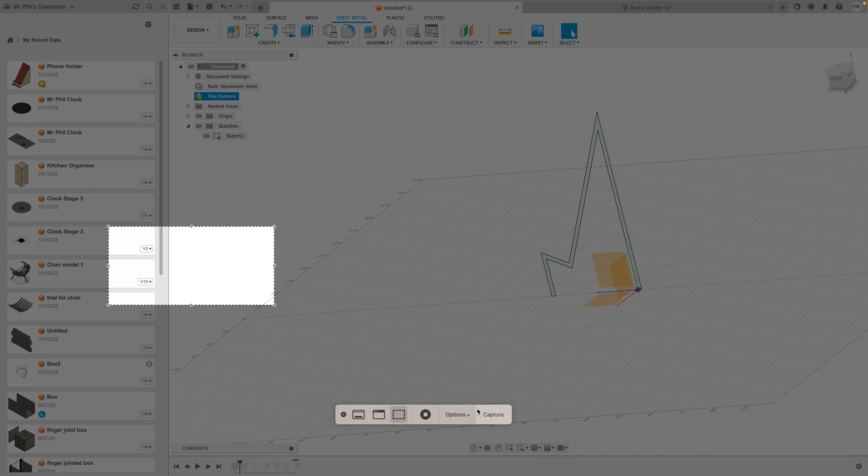Okay, so step one is you need to draw the basic outline with the angles that you need, right? Does everyone feel like they're comfortable doing that? Yeah, okay, so this is how.

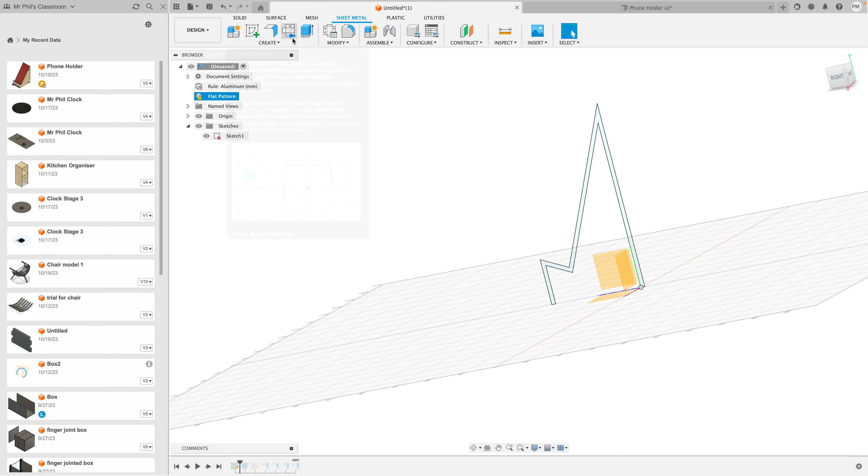So then, of course, you're going to extrude that shape out, and so I'll quickly do that. I don't know what's the width we're going to go with—65, 60, let's go with 60. Okay, so that's going to be the basic shape.

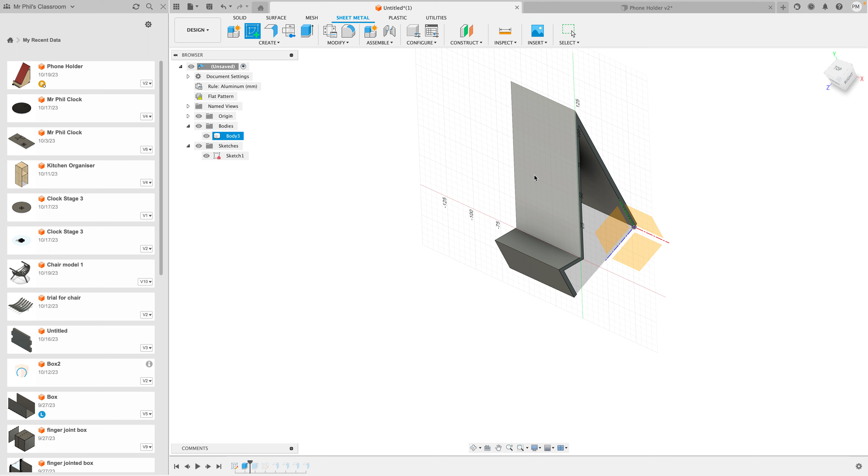So we're going to now use this shape to help us make a sheet metal shape. We're going to go up here to the sheet metal tool, and the first thing we got to do is project part of this shape onto this new sketch. So I made a sketch, clicked on the shape, and now I'm going to hit P. That turns on my projection tool. I'm just going to click on this, click OK, and now you can see that shape is projecting through onto my sketch.

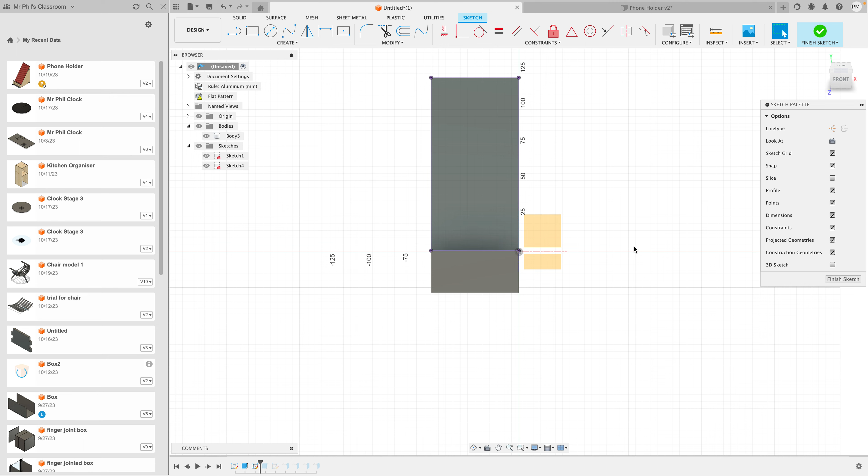Okay, so now I've got a sketch that I can use to make a piece of sheet metal. So I'm going to go Finish Sketch. Now this is the tool you want to use, it's called the flange tool. I'm going to make my first sheet metal flange.

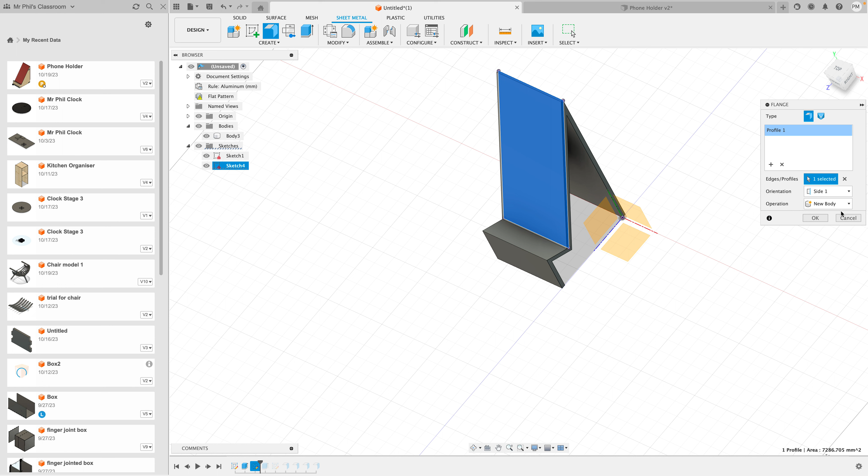I'm going to click on here, and you can see it automatically makes the first part of my shape, right? I'm going to just make it a new body for now—you could make it a new component. I'm going to click OK, and now I'm having a hard time seeing the difference between that and my base shape.

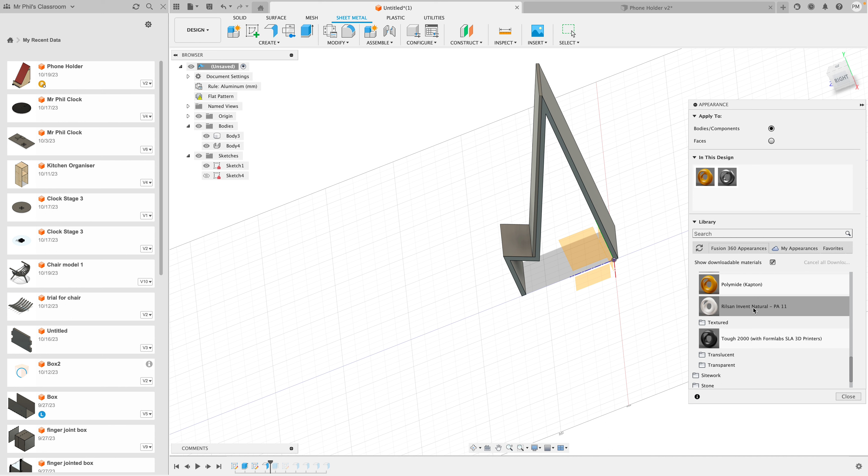So what I'm going to actually do is go over here to Modify Appearance, and I've already done this. I went to Plastic, and I'm just going to use one of the plastic colors. That just helps me see the difference. So that's my first shape.

So now what I'm going to do is I need to go make a new flange, and I'm going to click right on the edge here, and I'm going to pull this out, because you see I'm now basically simulating bending the plastic, right?

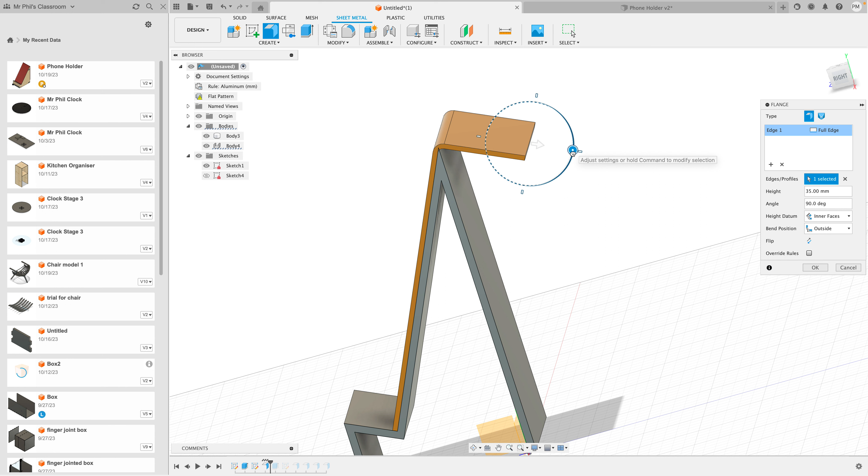The angle's wrong, so I'm just going to go over here to my angle tool. I'm just going to make sure I angle it down so it goes in the direction I want, and then I can just pull it down.

Now this part, there's probably a better way to do this than the way I know how to do it, but to get it to line up, right, this is set to go up and down in increments, and somewhere in the settings I'm sure you can change those increments. So if anyone figures that out, let me know.

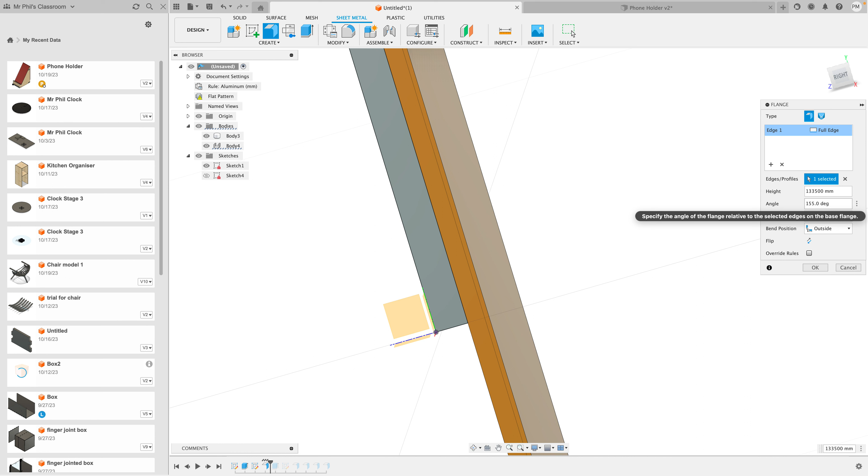And that's probably the easiest way to do it. What I was just doing was going over here to the height and playing around with it, so I know it's 133 point something—maybe 133.5, 133.6, so it's probably 133.55, close enough. There's definitely a better way to do it, but that's the only way I know for now.

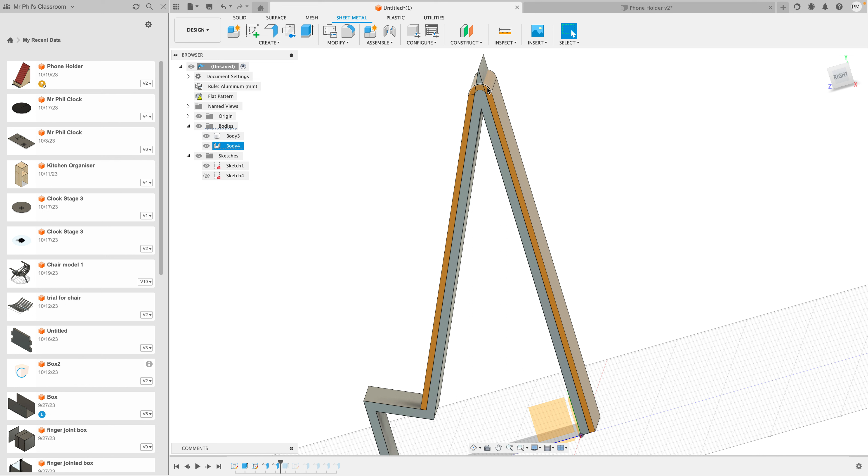Okay, so I've now done that bend, and you can see it's now bending it as if I'm actually bending some 3mm acrylic, right? Now I'm going to go in here.

I'm going to get my flange tool and do the same thing here—pull this out. Now you can see here my bend is happening below my shape I'm using. So what I can do is go to my bend position, and instead of making it outside, I can make it inside.

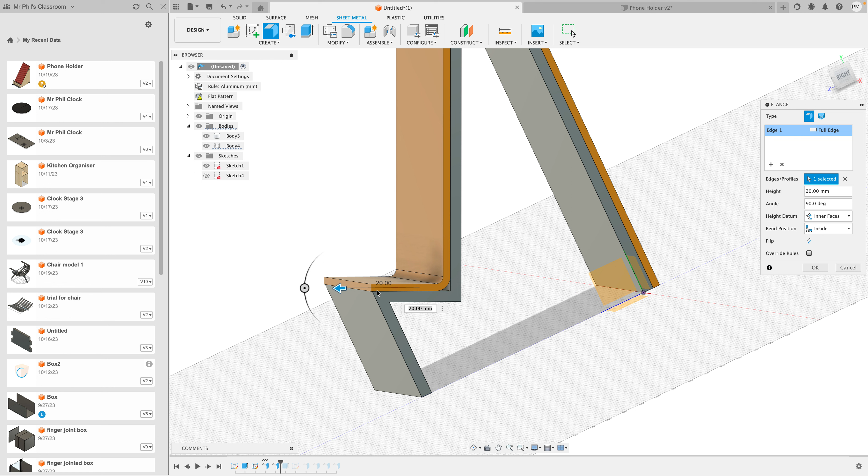So now the bend position is on the inside, and that looks pretty good. I'm going to go OK for that one, and then I'm going to go get my final bend here.

Pull this one down. This wasn't quite the same angle, so what I'm going to do is bend it like that, and I'm going to go outside. We'll call that good enough.

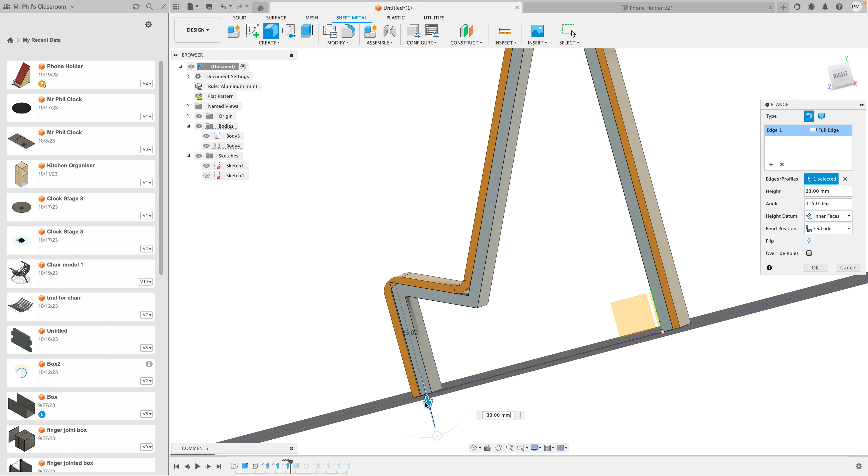Okay, so I've used the first shape to get my angles right. So if I turn off this first shape, now I've simulated a piece of bent plastic. That makes sense so far?

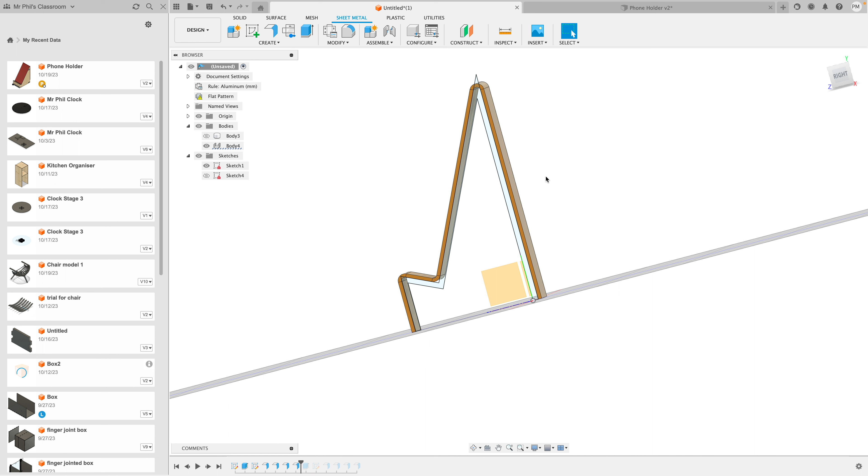So the cool thing about this is once you've got this piece of bent plastic, you can go over here to the Create Flat Pattern tool. So what I have to do is first pick one face—this is going to be the face that stays stationary, and all the rest will get bent flat with it. So I'm just going to click on the back here and click OK.

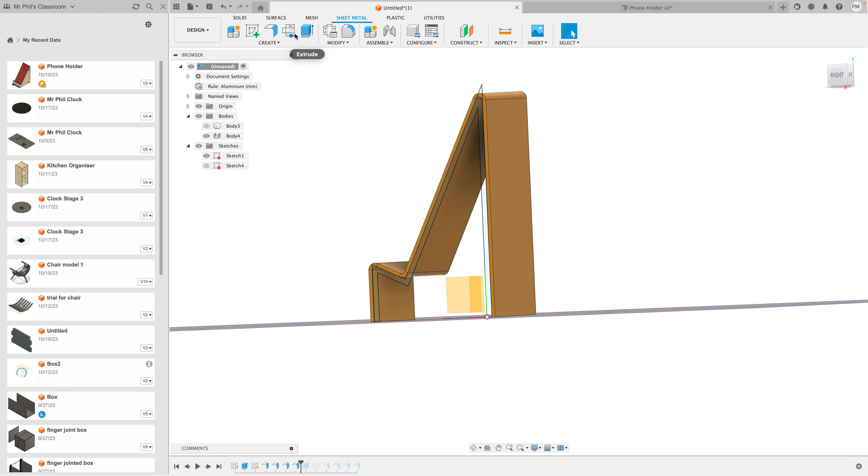Oh darn, I already made the flat pattern. Let's go delete that flat pattern. Okay, so we're going to go flat pattern, click on this, click OK, and it'll open the whole thing up.

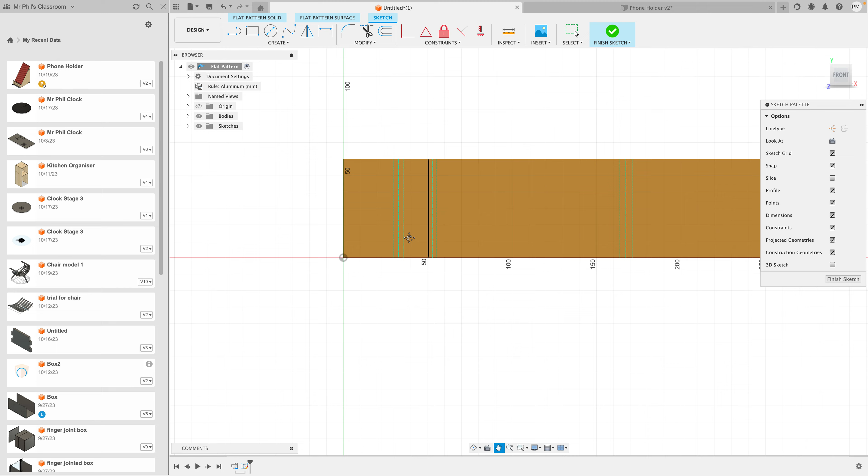Okay, so now I can use this to make a new sketch with all the correct dimensions. So I go Sketch, and I'm going to put the sketch right on top here. Now what I want to do first is click P, and project the outside shape, and make sure I project these bend lines in here as well, because then I'll know where to line it up when I put it on the line bender.

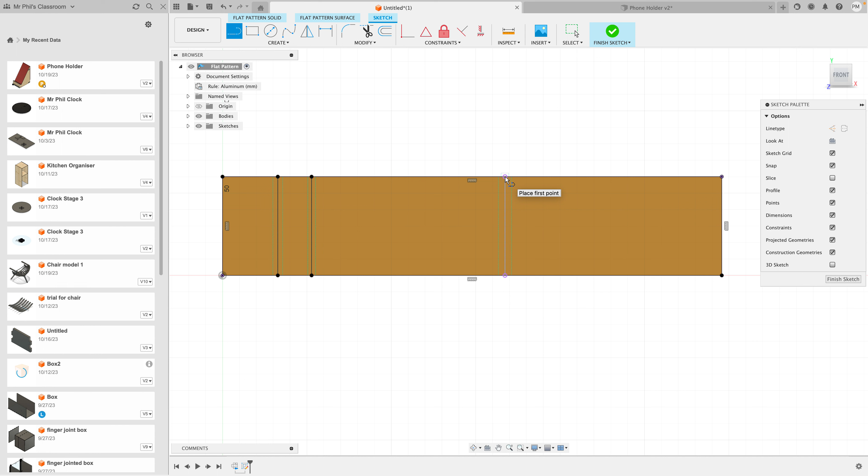Okay, so now all I have to do is go get my corner rectangle, and it should just click onto the projected geometry, and then I can go get my lines here and draw those in, and again they should connect to the projected geometry. And then if I go Finish Sketch, and turn off that, now I've got a sketch that I can export.

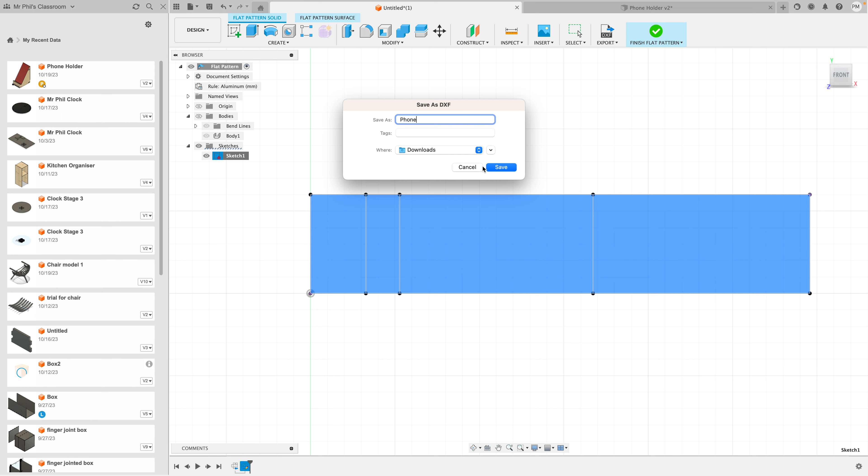Okay, and I'll show you in another tutorial the next step, but what we're going to do is save this as a DXF file. We can call this phone. And in order to be able to send this to get it laser cut, you're then going to open that up in Adobe Illustrator, but I'll do that as another tutorial later.

So, are there any questions?